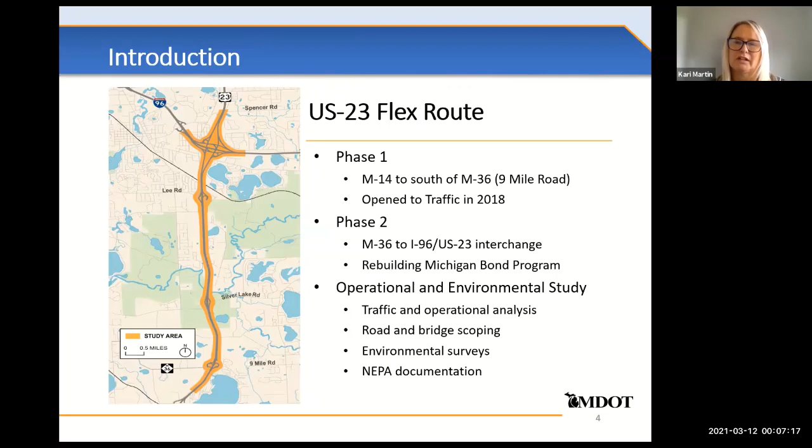The inclusion of the project in the governor's bond program enabled MDOT to begin an operational and environmental study to assess public sentiment for the project, traffic safety and operations, road and bridge scoping, environmental analysis and surveys, and finalizing with environmental documentation that will be submitted to the Federal Highway Administration.

So the flex route is dynamic, active, and real time. It's monitored through the use of full camera coverage 24 hours a day by MDOT's statewide Transportation Operations Center that's located in Lansing. Gantries are spaced every half mile and are used to monitor and control traffic to improve flow and safety during the peak hours of the day and during incidents and events.

Through data collection of phase 1, we've documented improvements in travel time and reliability, especially in the southbound direction in the morning. Speeds have increased in both directions. While crashes are up in the northbound direction, overall the crashes have been reduced. However, because of the endpoint at M36, we know that the biggest benefit of the extension is going to be for the northbound direction in the afternoon.

MDOT would like to thank everyone who was involved in the phase 1 project to make it a success. We also had individuals who participated in MDOT's joint research study with Michigan State. The focus groups really shared some keen insights, which are allowing us to build in best practices for this next phase of construction. The research project is continuing and will further investigate corridor performance and the flex route's impacts on safety.

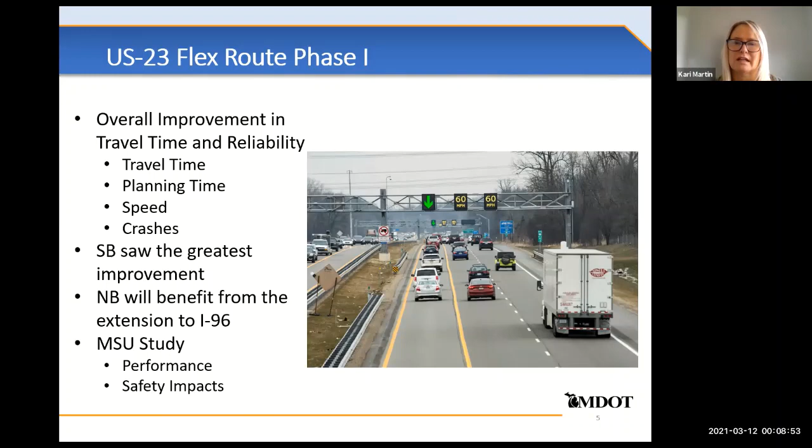So in general, the purpose of the study is to focus on traffic safety and operational needs for the corridor and the interchanges by addressing the directional weekday, Monday through Friday peak period congestion, and assess the road and bridge infrastructure condition. Through the development of safe, efficient, sustainable transportation improvements that will ensure that the corridor will meet current and future highway operations by using state-of-the-art traffic control technology along with improved infrastructure.

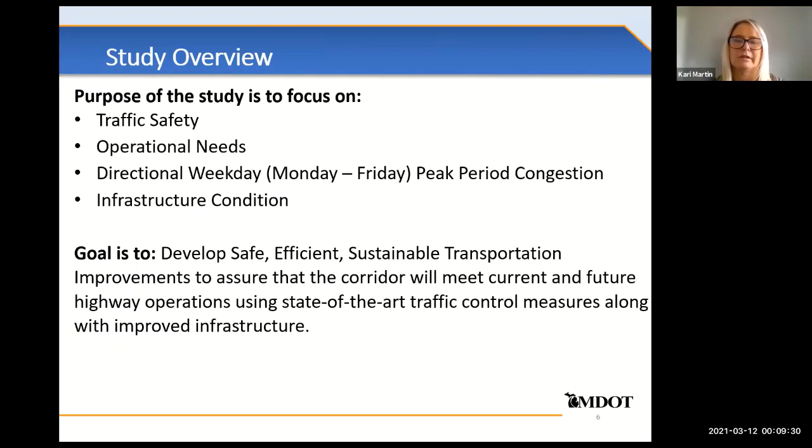So to move forward, the study team focused on alternatives that are economically feasible in this day and age of restricted funding, pavement and bridge condition and maintenance, ways to mitigate congestion, traffic operations at the M36 Silver Lake Road and the connection between the Lee Road and I-96 interchanges, including on-ramps that are short and that do not allow for adequate acceleration and merging and weaving of traffic, looking at high crash segments and incident management areas where crashes can be safely cleared and investigated.

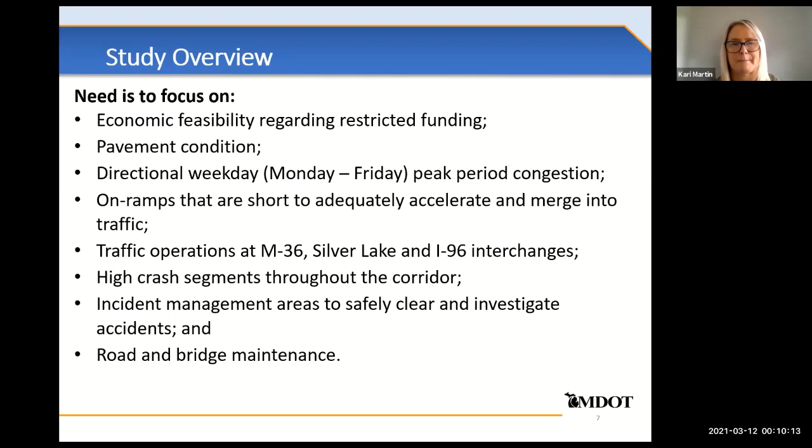The study includes scoping the road and bridges from a conditions standpoint to determine improvement needs to accommodate the extension of the flex route to 96, modeling the mainline traffic to extend the flex route, and modeling traffic to determine the recommended alternatives for the M36 and Silver Lake Road interchanges to improve their traffic operations and safety.

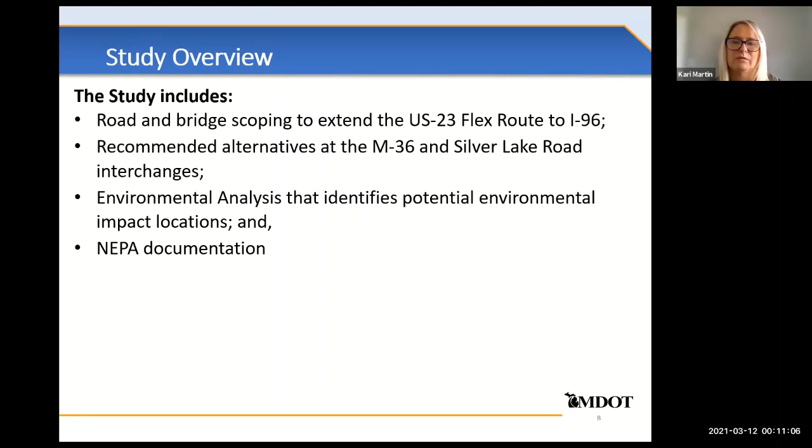Environmental analyses to identify potential environmental impact locations for the future build configuration, and documentation to environmentally clear the alternatives to move into design, right-of-way acquisition, and the construction phases. Environmental documentation is a requirement of the National Environmental Policy Act and a requirement to use federal transportation funding.

So I'm sure that all of you recognize the challenges along the US 23 corridor north of Ann Arbor. The flex route was constructed to address the corridor's significant peak hour congestion, as many people reside in Livingston County and northern Washtenaw County, work in downtown Ann Arbor, or commute east along M14 to the Detroit area. And also to help address significant non-recurring congestion in the form of U of M game day traffic, incidents, and consistent summer tourism travel.

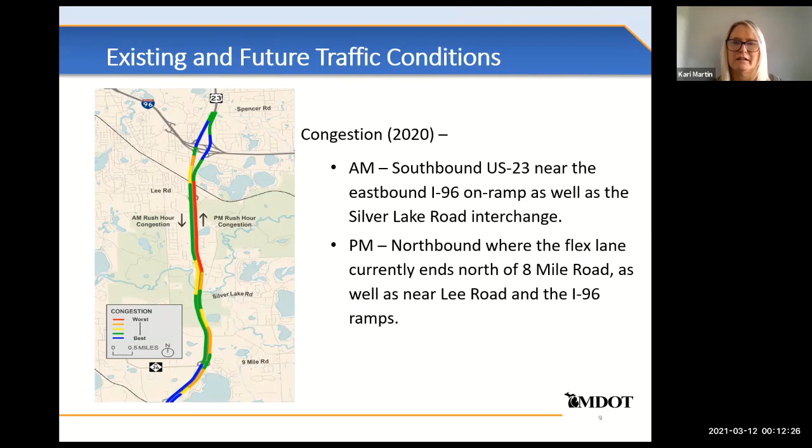The section of US 23 between M36 and 96 still experiences these issues, and phase 2 will improve the morning southbound congestion near the eastbound 96 ramp and the Silver Lake Road interchange, and will improve the northbound direction where the flex route currently ends south of M36 and near the Lee Road and I-96 ramps. So even though the pandemic has changed traffic patterns along the corridor, we do continue to see traffic volumes trending upward. And so we are moving forward with the improvement in that we do see that trend of upward traffic continuing.

We analyzed crashes from 2015 to 2019 and found that the highest percentage of crashes was near the interchange areas, with 99 crashes per year in the southbound direction and 228 crashes per year in the northbound direction, which was not surprising. We found also that a high percentage of these crashes were rear end crashes, which are typically tied to various forms of congestion. Short acceleration and deceleration lanes at the interchanges also have an impact on safety and crash numbers.

We are confident that extending the use of the flex route's real-time dynamic shoulder, monitoring speeds, crash investigation sites, interchange improvements, ramp extensions, dynamic message signs, and camera coverage to manage traffic and incidents will not only improve the phase 2 section, but will also improve the safety operations at the endpoint of the existing phase 1 section.

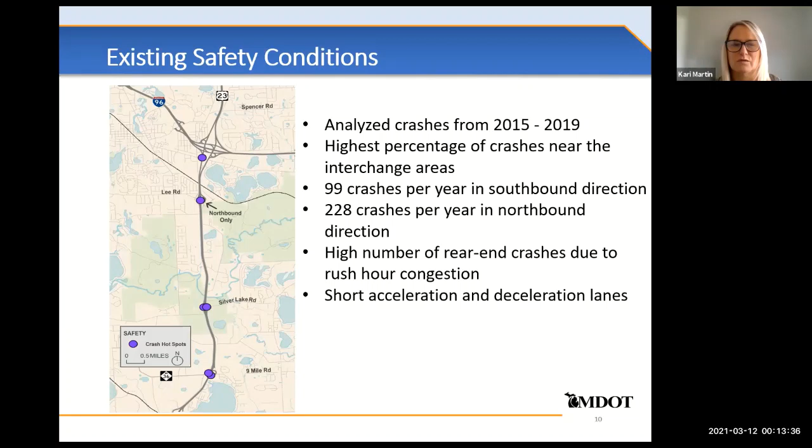So with the bridges, with the corridor being built in the 1950s and 60s, the pavement, bridges, and interchange geometrics in the phase 2 section are aging and substandard. The shoulders are narrow, the acceleration and deceleration lanes are short. The pavement condition is fair to poor, and the bridges are narrow and in fair condition.

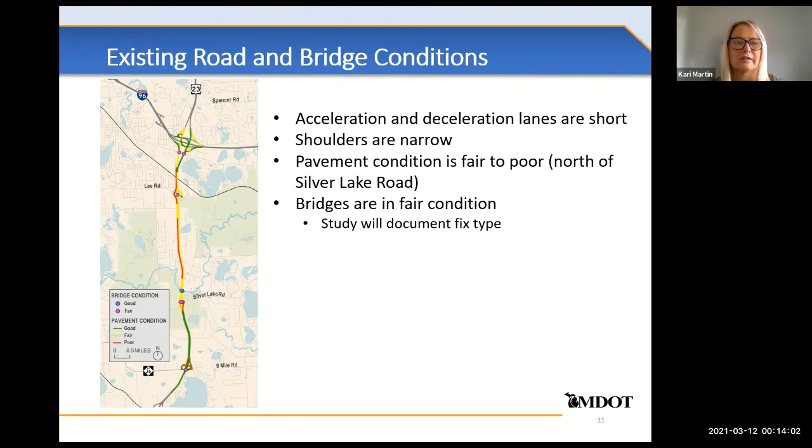So to summarize, the flex route is dynamic, active, and real time. The US 23 corridor will continue to be monitored through the use of full camera coverage 24 hours a day by MDOT's statewide Transportation Operations Center. The additional gantries will be spaced every half mile and will be used to improve traffic flow and safety during the peak hours of the day and during incidents and events.

Once completed, your community will have a flex route system on US 23 that extends from M14 north all the way to I-96. I'd also like to point out that other flex route projects are being studied and planned. The I-96 flex route between Kent Lake Road and I-275 will begin construction this year. And a second phase between US 23 and Kent Lake Road is being analyzed for a future year.

While there is no construction date for the phase 2 I-96 project, we've been working really closely with the I-96 team to make sure that the US 23 flex route operates seamlessly with or without the second phase of the I-96 project.

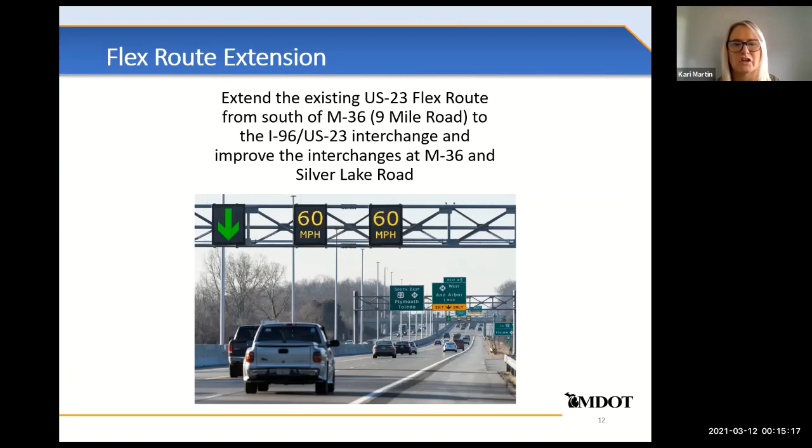So the preferred alternative for the I-96 US 23 interchange: for the northbound direction, the flex lane will be extended from where it currently ends near 9 Mile M36 north toward I-96. This is shown in the green on the graphic. Then the flex route shoulder will become a dedicated lane or an auxiliary lane at Lee Road for the left-hand exit onto westbound I-96, which is shown in blue.

This will be similar to what happens currently on the flex route today, if you can envision the southbound traffic at M14. We added an extra lane to kind of properly split the traffic. Heading southbound, the flex lane will start just before Lee Road, but prior to that, an auxiliary lane will be added on US 23 on the right between the eastbound I-96 ramp, which is shown here in red. This will help balance the traffic in this segment.

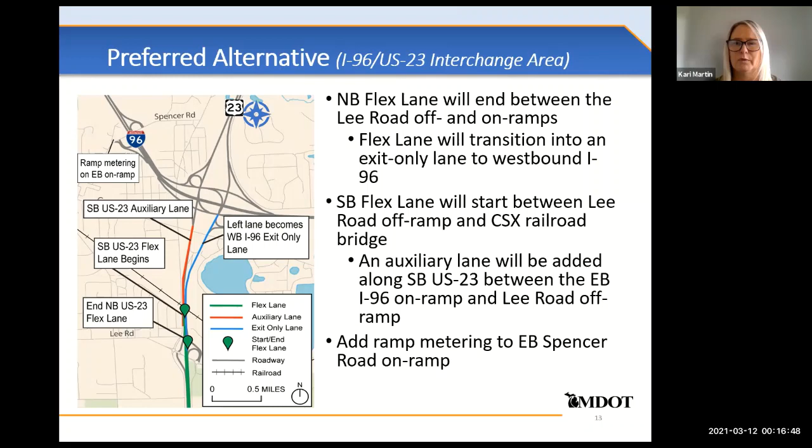In addition to the flex route extension, this project will also add ramp metering to the Spencer Road on-ramp to eastbound I-96. This will help to reduce the congestion on I-96 as it approaches the US 23 interchange and help with the merging and weaving at that location.

So along with the bridge improvements at the Silver Lake Road and M36 interchanges, the two Grand River Avenue bridges over US 23 will be rehabilitated. The railroad bridge over US 23 will not be replaced. However, the main line will be reconfigured underneath to accommodate the flex route operations. The Lee Road Bridge will be rehabilitated. And the two bridges over the Huron River will be modified due to median widening to accommodate the flex route extension.

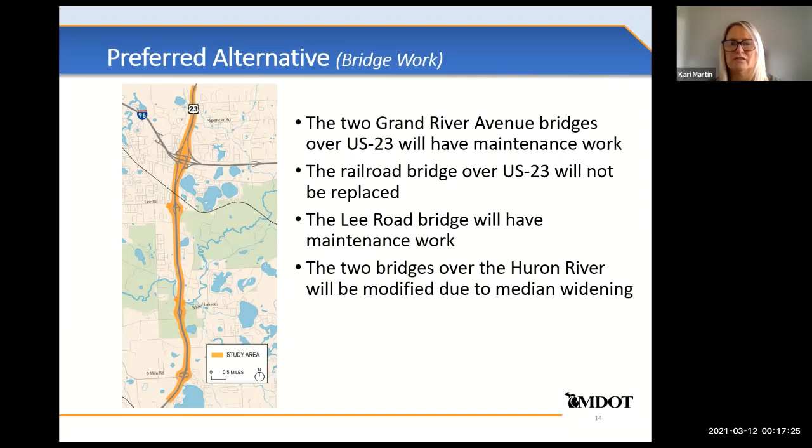And with that, I am going to pass the next handful of slides over to Mike Davis to talk about the preferred alternatives at the Silver Lake Road and M36 interchanges, and also some future planning efforts for non-motorized for the area. Thanks, Kari. Appreciate it. Hopefully everybody can hear me okay.

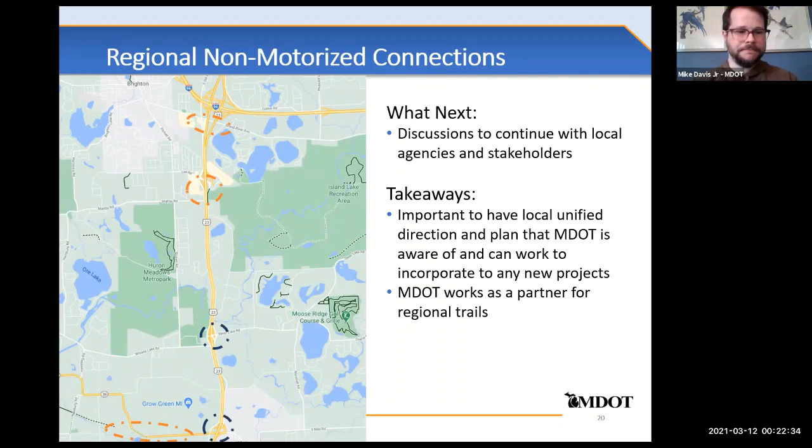So as far as the preliminary environmental findings, 4 impacts pretty much stood out as of primary concern through the study. The Threatened and Endangered Species Survey identified the federally protected snuffbox mussel in the Huron River. MDOT has completed a biological assessment and is coordinating with the US Fish and Wildlife Service to mitigate for the impact that the construction will have on the snuffbox. So more of that to come. We've submitted the biological assessment and we'll be getting a determination back from them early this summer, I believe.

Wetlands and watershed areas will be minimized or mitigated, with most of the work being completed in the median, except at the interchanges. Impacts outside of MDOT right-of-way have a minimal effect. And then the noise: the draft noise analysis is complete, and the draft report is on MDOT's website for review.

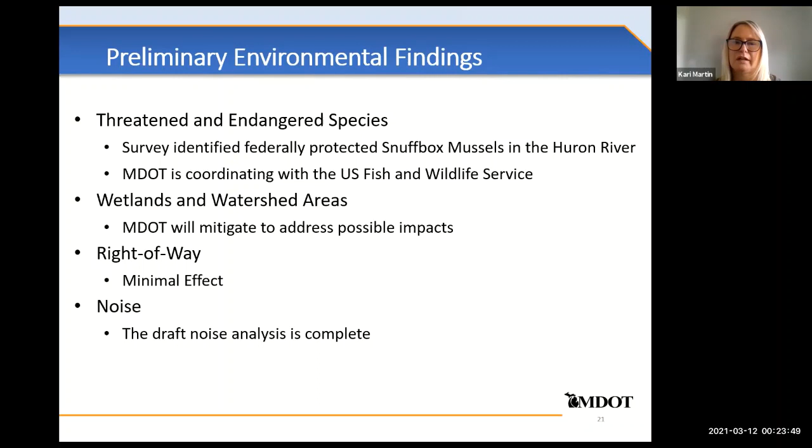So what are the next steps? The environmental NEPA documentation will be submitted to the Federal Highway Administration early this summer. It is a categorical exclusion, which through Federal Highway Administration is one of the lower levels of documentation. However, it is the same level of analysis. It's just a lower level of documentation that was provided.

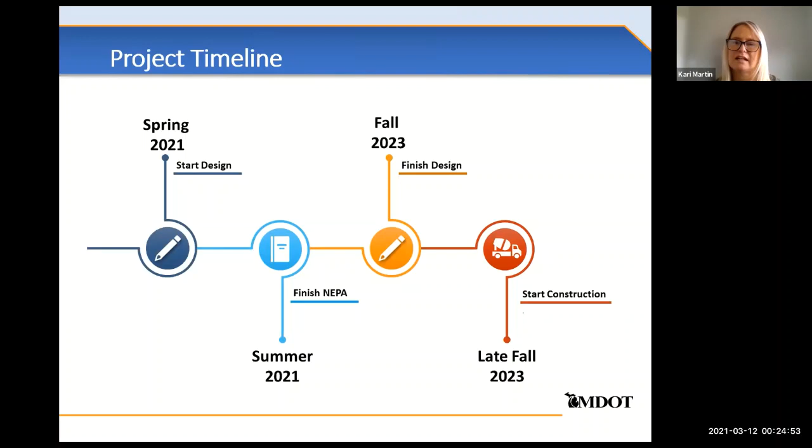Design will begin this spring with right-of-way acquisition following, as Mike mentioned, with an appropriate level of design completion and some level of construction to begin in 2023. Also, Mike mentioned that there will be some more discussions about the interchange designs and the impact that the non-motorized has on those interchange designs. We'll also have more public and stakeholder involvement and provide additional information as we move into the design and construction phases of the project to keep you up to date.

So with that, I don't know if there are any questions or any further discussion, but that kind of concludes our presentation.

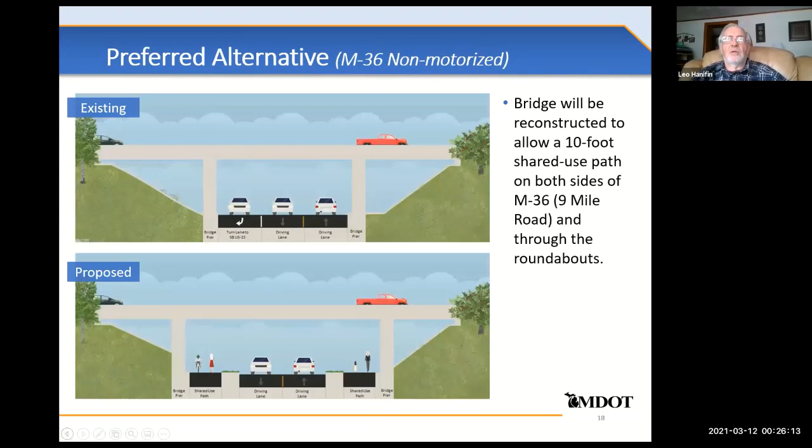Thanks. A couple quick questions. I'm on the steering committee of the Livingston County Transportation Coalition, by way of introduction. I'm curious, will there be any widening of the non-motorized on the Grand River bridges? And also, could you show exactly how the non-motorized will get around the traffic intersections? Like how many roads will they have to cross in either direction on the M36 and Silver Lake interchanges?

So Grand River Avenue is kind of part of that longer term discussion. We are doing some, I'm going to call it rehabilitation, but it's more of a minor fix. It's not a full replacement. When we get to fully replacing a structure is kind of when those non-motorized components can be added to that.

One thing is Grand River Avenue is not under MDOT's jurisdiction. It is under the Livingston County Road Commission's jurisdiction in that area. So we would coordinate, and I think that's why we're proposing that larger discussion of non-motorized needs in the county, so that the road commission, the township, and MDOT can all be on the same page once that replacement does come to fruition at some point in time based on conditions.

So as far as the preferred alternative for the M-36 interchange, this is kind of how the operations work, and as you can see through the roundabout, the crossings are at a 90-degree angle. These are 10-foot wide paths. So there's the ability to actually use the path on both sides for both bikes and peds.

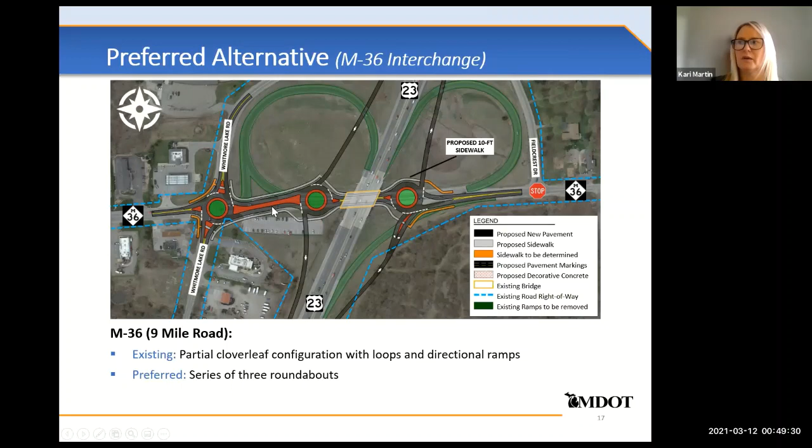Anything else, Kari? Yeah, one other thing, and as I'm looking at this slide, I just want to point out too that we will be removing this park and ride lot, but we will be replacing it, most likely in this area up here in the northwest quadrant. So there will be some changes there, which will also help with traffic flow because you're getting that driveway out of that mixture with the roundabouts.

And then also at Silver Lake Road, you really can't see it very well, but our new design will cut through that park and ride, and we will be shifting that park and ride to the north. We will not be removing it. We will be kind of replacing it just to the north of this picture here. So just to let you know that that's also part of the discussion.

Okay, we have a couple. Oh, go ahead, I'm sorry. I wanted to let Mike Davis know, this is Maggie Egan. I had reached out to Mr. Sweeney, I think he's our service center manager. Right, okay, so he was my only contact person from the first phase of the flex route. So I emailed him a few months ago with questions about the old railroad tunnel. So he did investigate some things for me. Okay, he'll be a good contact for you.

Great, thank you. It was filled in '93, so it sounds like there's some infrastructure buried, but it's been buried since '93. And then the top half of the bridge was removed. And that was partly why I asked the question about the area that's just outside, just south of the slide that you have, because that's about where that tunnel would be, just outside of the view of that slide you have.

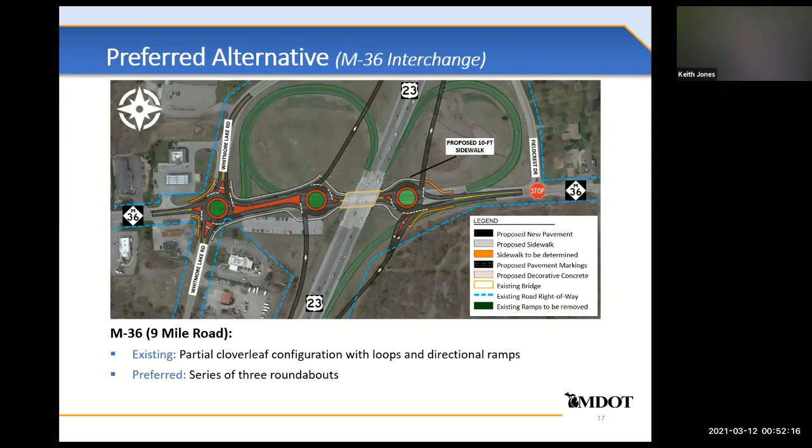Okay, Keith has another question coming around the second time here. Yeah, that was also pertaining to what Janine said about the survey and the meeting that was brought up, that they were mailed out. I think I live in the area that she was referring to, but I have not seen anything. So I wanted to know how long ago those surveys or those mailings were sent out. I believe Mark St. Charles sent the letter out probably two weeks ago.

And again, so it's like M36 to Silver Lake Road, if that's indeed on the west side. Yeah, I'm on the west side, but I'm further north of that. I'm between Silver Lake Road and Lee Road. Okay, so that was not included in the letters that were sent out. Is there going to be a bike path on that side, on the Whitmore Lake Road side, between Lee Road and Silver Lake Road? That is what we're exploring at this point. Okay, because there's not a lot of room between the road and the front of my property, so that's what my concern would be.

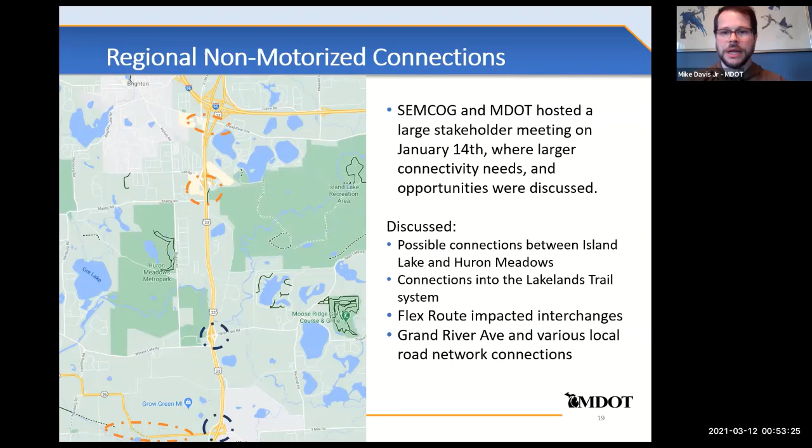So I believe the idea was to take it to Silver Lake and cross Silver Lake and have the connection be from there. So I don't think at this point it's extending north of Silver Lake. I believe that's what the discussion was, heading from where it currently exists on the east side, crossing at Silver Lake, and then heading down on the west side. I believe that's what the future discussions were. Okay, so it sounds like it would skip the area that I'm in. Correct, I think so. Yeah, alright, thank you.

Okay, Kathleen. Oh yes, I had a motorized question and a non-motorized question. Kari, you had mentioned that there would be ramp metering on Spencer Road. I'm not familiar, or I can't visualize what that is. Is it a traffic light arrangement where it tells you when to go? Yeah, so it's, I mean, it's not necessarily a traffic light, but it creates like a yield condition. So the person on the ramp has to kind of wait for traffic to clear to get onto the freeway.

I can get you some more information on that. I am not sure exactly what the full design of that looks like, but I can get you some more detailed information. We are also incorporating some of those on I-96 with the 96 flex route near the Novi area.

We are going to put together some sort of educational campaign for that, like how to use them and that sort of thing. I'll make sure that information gets to you when we have it.

As far as non-motorized, a resident recently mentioned to me that under I-96 in Ingham County there is a pathway along Sycamore Creek that goes under I-96. He wondered whether the two Huron River bridges you're modifying on US-23 would have enough headspace for there to be trails underneath along the river.

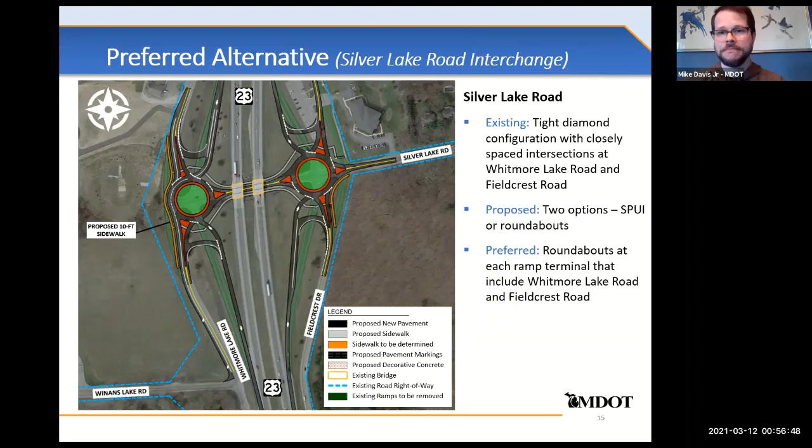As far as my clock says, we've got about 3 or 4 minutes here, and I have Jim Fackert. I'm not sure if Keith Jones had another question, but I think we'll leave off with Jim and Keith. I actually don't have another question—just a couple of quick comments. Okay, then we'll leave off with Jim here.

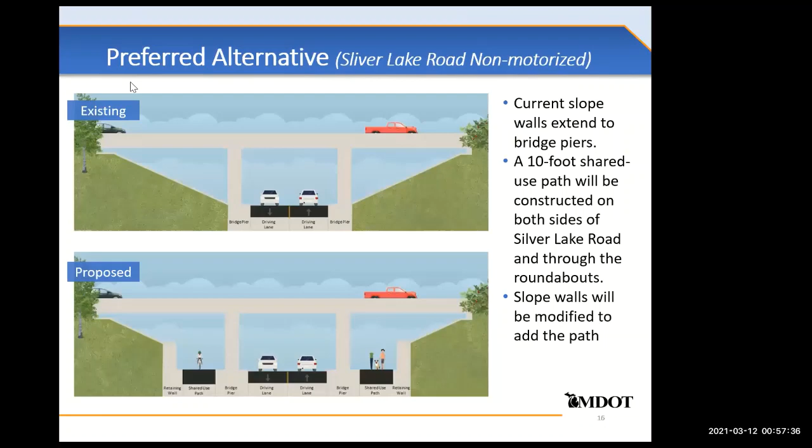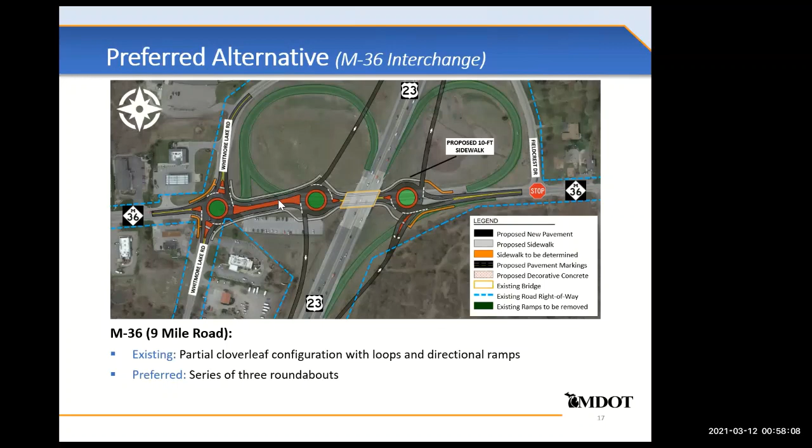The other comment is that the river coming under the freeway—that river corridor under the freeway is concrete walls and river. It rises and falls a few feet, but it doesn't flood in there at all.

We had proposed years ago the possibility of an elevated bike pathway under there. If seasonally it had six inches of water on it, it wouldn't be a big deal, but it would encroach on the river flow, and that's a bad thing. So the water levels there aren't too crazy. That's it, thanks again.

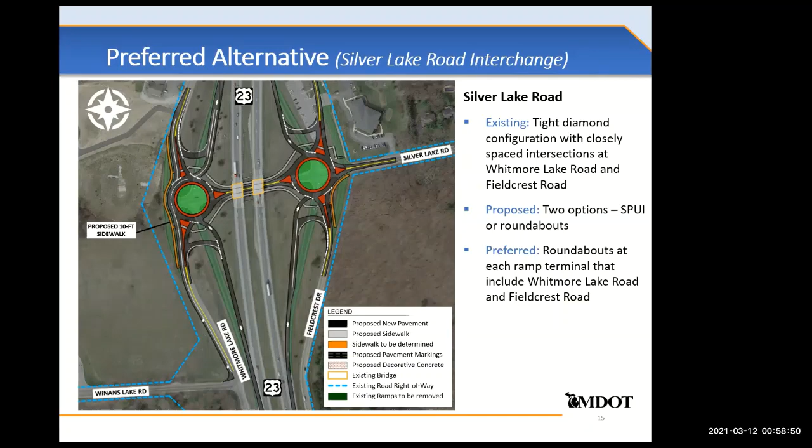Hey, that was all of our questions. So I guess either Scott, Kathleen, Carrie, or Mike want to wrap up.